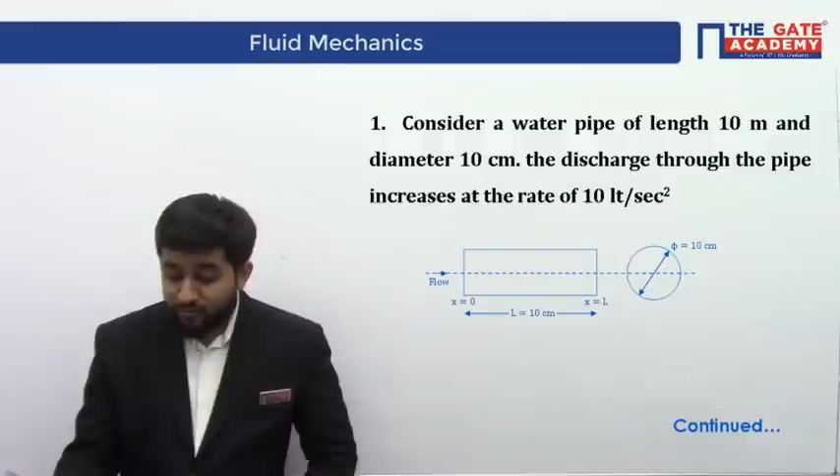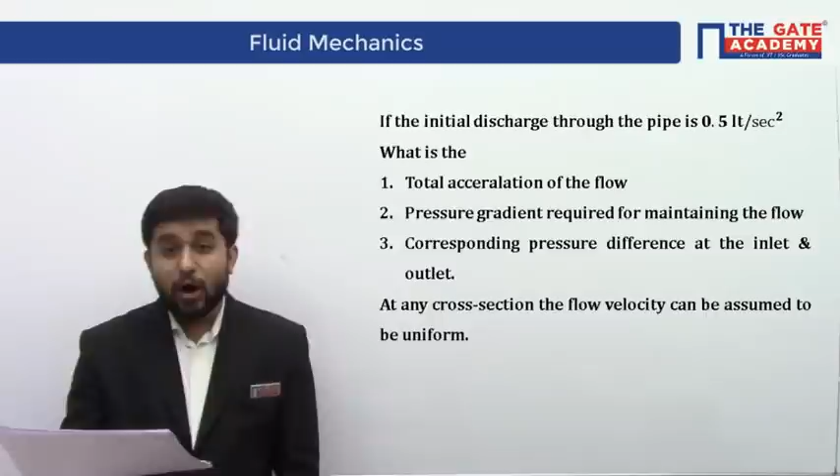Let us see the first question. Consider a water pipe of length 10 meters and diameter 10 centimeters. Through this pipe, the discharge increases at a rate of 1 liter per second square, and the initial discharge is 0.5 liter per second. Calculate the total acceleration of the flow. Also find the pressure gradient in the flow and the corresponding pressure drop required between the inlet and outlet of the pipe for the same flow. Give it a reading please.

I think the question is very easy. Let us suppose there is a pipe of length 10 meters, let us call it L. Also the diameter of the pipe D is equal to 10 centimeters. Now what they are saying is that the initial discharge through the pipe—initial means at time instant t equal to 0—at t equal to 0, the discharge is 0.5 liter per second.

They have given a term that says the discharge increases at a rate of 1 liter per second square. Please note, what is discharge? It is liter per second. So what they have given you is del Q by del time equals 1 liter per second square. This is how the discharge is increasing.

Now for the same condition, they are asking you to find out the acceleration in the flow, and then they are asking you to find out the pressure gradient in the flow and corresponding pressure drop.

Whenever such questions come, what is acceleration? Acceleration is simply dv by dt. So if you know the velocity as a function of time, you can get this derivative and predict your acceleration. So always remember, whenever acceleration in the flow has been asked, you simply need to find out the velocity field, and by derivating the velocity field with respect to time, total derivative of velocity with respect to time, you will get the acceleration.

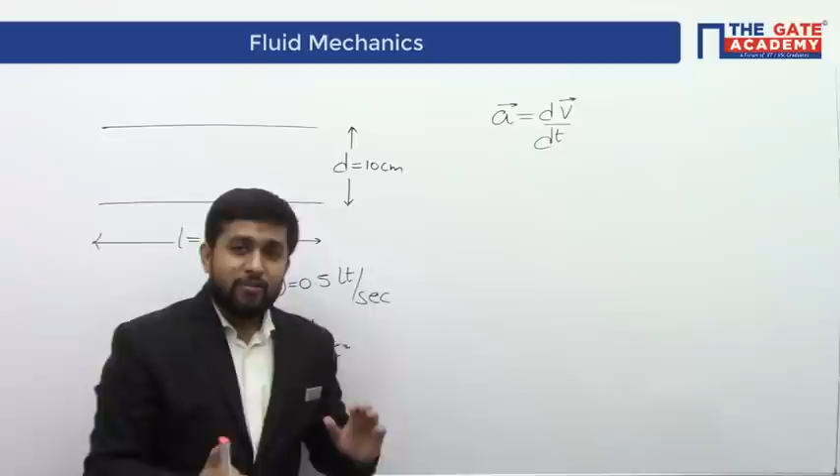Now actually in our syllabus, for such type of questions, there are two inherent assumptions which are generally not mentioned in the question. So I will ask you to cram this. Whenever such questions have been asked where they are asking you acceleration in the flow, you have to cram two assumptions.

And what are those two assumptions? Those assumptions are that if the flow passage is converging or diverging — here it has a uniform cross section, but suppose a question comes where there is a converging or diverging passage — in that case, you will assume that the convergence or divergence is gradual.

Let's see what that means. So suppose we talk of a flow passage. This is your flow passage, and this is the center line of the flow passage. Let's see what is the meaning of this assumption, and why we want to take this assumption.

So what I am doing is, I am marking a coordinate system here along the center line of the flow passage, and this will be my x, y, z coordinate system. Now it is definitely by intuition, if I take any location over here, whatever particle comes at that location, it will have a resultant velocity vector like this, isn't it? It will have a velocity vector like this.

Now these velocity vectors will have two components. So this will be along your v and this will be along your u, right? Now check, suppose this angle is theta — this angle is theta, which is like half the cone angle. Half the cone angle. So I think by alternate interior angles, this angle will also be theta.

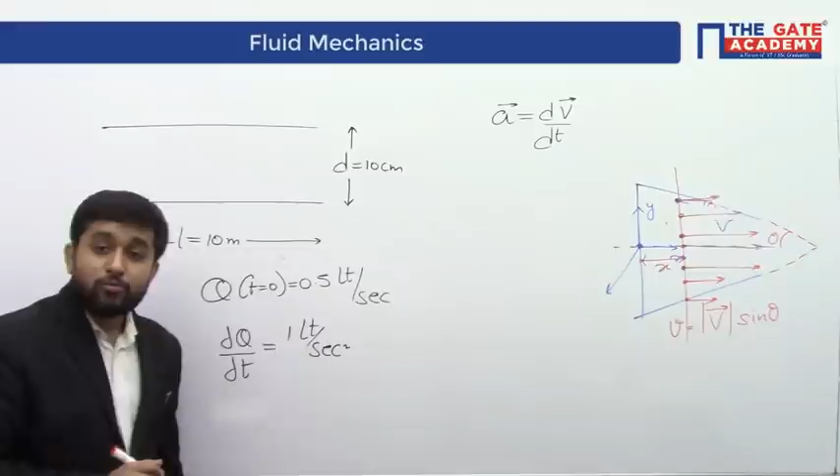Now I hope all of you are aware of viscosity, and we know that because of viscosity, there is a formation of boundary layer in the flow. What is the meaning of boundary layer? That is the layer of fluid which is adjacent to the solid surface. Those layers stick to the solid surface — no slip condition. And the layers of fluid which are away from the solid surface, they have maximum relative velocity with respect to the surface.

So definitely at these locations, the flow velocity u will be having a value 0. And at this location, which is at farthest distance from the surface, the flow velocity will be maximum. So what I am trying to say is that at a cross section, the velocity profile is not uniform, right?

But what we will assume is that in these questions, the fluid is non-viscous in nature. If the fluid is non-viscous, there will not be any formation of boundary layer. And since there is no formation of boundary layer, at any section, the flow velocity will be uniform. So basically, at any section, the flow velocity will appear like this, okay?

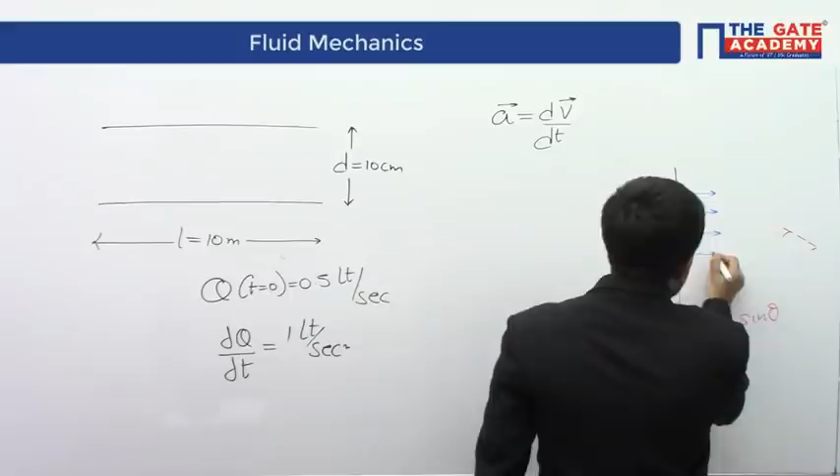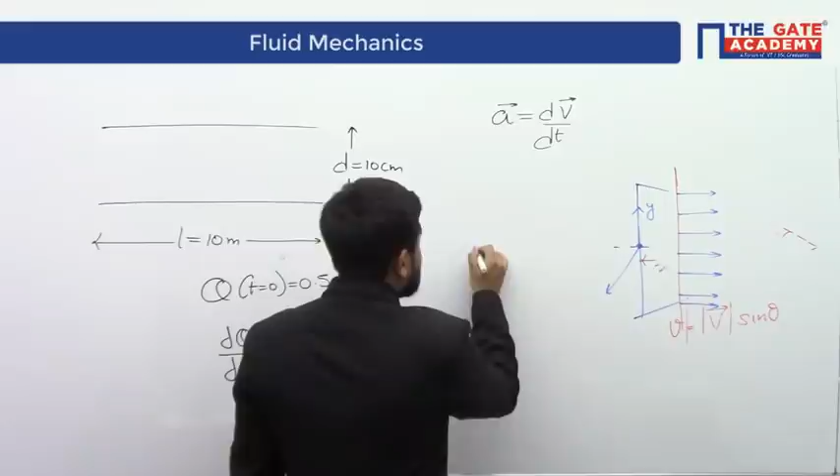And when the flow velocity at a section is uniform, then the same flow velocity is actually equal to mean flow velocity also. So how do you write down mean flow velocity? The mean flow velocity is simply discharge per unit area, okay?

So please note, actual flow and mean flow velocity are two different terms. Mean flow velocity is simply a scalar quantity which represents the discharge crossing a section. But actual flow velocity is the actual flow, that is u, v, w, and u as a variable quantity along y and z. It's like this, okay? But because of these two assumptions, we can represent the actual flow by the mean flow velocity.

So whenever a question like this comes, you simply need to write down the mean flow velocity, which is equal to discharge per unit area, okay? So I think that's all, that's sufficient for the discussion of the question. What you have to remember is that these two assumptions will be valid even if they are not written. So you will simply write mean flow velocity is equal to discharge per unit area.

What is this? This simply means that if in the flow I take a section, which is at a distance x from the inlet section, then at a particular time instant t, the mean flow velocity v here will be equal to discharge crossing the section per unit area of the section. Okay, this will be the mean flow velocity.

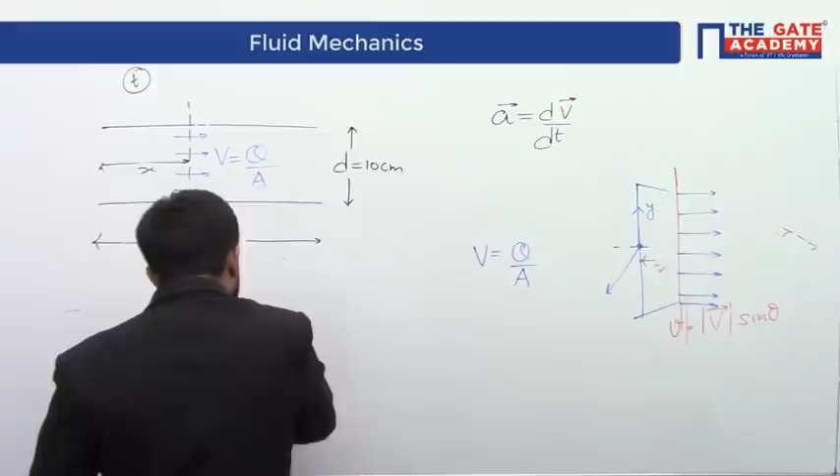Now let's write down the variables on which this mean flow velocity depends. I hope you remember that in Eulerian approach, we write down the quantities as function of location and time. Here also the quantities are function of location and time, that is x and time. Now as we are talking of mean flow velocity, that is the discharge crossing a section, and section is represented by the YZ plane, so basically now our location will be represented by x only, okay?

So check. I think when we talk of area of cross section, in this particular case, the area at x equal to 0, area at any intermediate x, and area at the outlet of the section is the same. But if this is a converging passage or a diverging passage, then for different x, areas will be different. So in that case, area will be a function of x.

Also, sometimes we have flexible passages like your blood vessels. So when fluid flows through these flexible passages, because of fluctuation in the local blood pressure, the diameter at a location keeps on changing. So area keeps on changing. So area becomes a function of time also, okay?

But since you are going to talk only of rigid passages, that is fixed solid boundaries, your area will not be a function of time. So you can simply write down area is a function of x only. So what we have is, for us, area will only be a function of x.

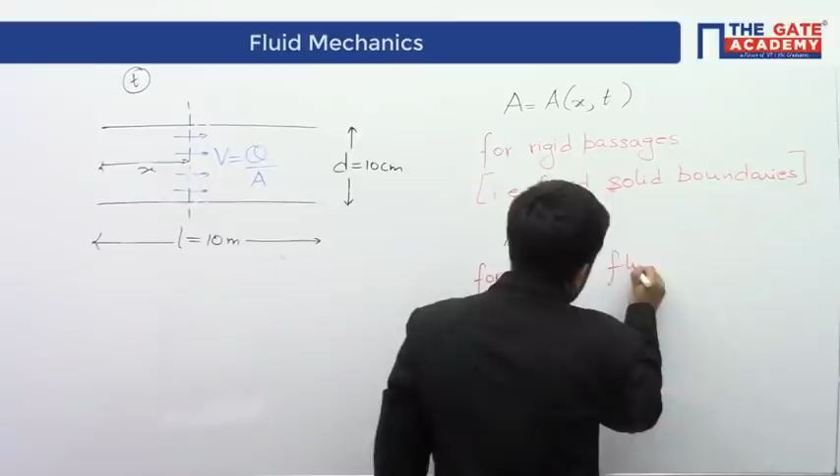So what you can say is, for incompressible fluids, your discharge is simply a function of time, because incompressible fluids means if 1 liter is coming inside from here, then another 1 liter will have to cross this intermediate section, and another 1 liter will have to cross the outlet.

So always remember, whenever you get a question like this, particularly talking of water or liquid, your area will only be a function of X, discharge will only be a function of time, and then you will write down velocity, which is discharge per unit area. This means discharge is a function of time, area is a function of X. Therefore, your mean flow velocity is also a function of X and time. So this is your mean flow velocity as a function of X and time.

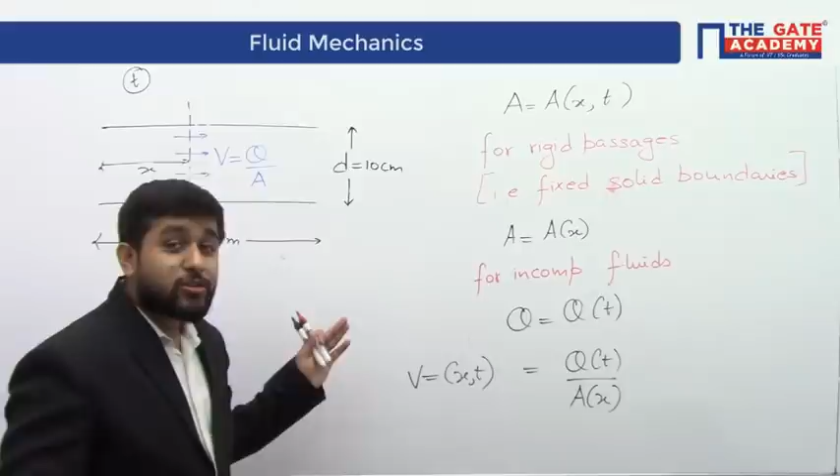Now we want the acceleration in the flow. So when you want the acceleration in the flow, you simply need to take the total derivative of velocity. So let's take the total derivative of velocity. But I hope you remember partial calculus.

In this particular case, we are taking the derivative of V, which is a function of 2 variables. So when you take the total derivative dV by dt, that is the acceleration in the flow, V being a function of X, you will have del V by del X, dx by dt, plus del V by del time, dt by dt. But this dt by dt will cancel out. So it's only this del V by del time left from that term.

Now, dx by dt, that is rate of change of x coordinate, is basically the actual velocity. But actual velocity is equal to mean flow velocity, so here you will have v only. So this becomes: v times del v by del x, plus del v by del time. So this is the total acceleration in the flow.

Now check: in the acceleration, the terms which have space gradients represent convective acceleration, and the term which represents time rate represents local acceleration.

What is the meaning of local acceleration? Local acceleration means local changes - at a particular location, say at the outlet, the velocity in the morning is different than the velocity in the evening. In the morning, Ram was crossing this location with a speed of 1 meter per second, and in the evening, Shyam was crossing this location with a speed of 2 meters per second. So we are talking of different times, but the same location, so definitely we are talking of different particles also. So we are simply saying that the quantities or conditions at a particular location change with time - that is a local change.

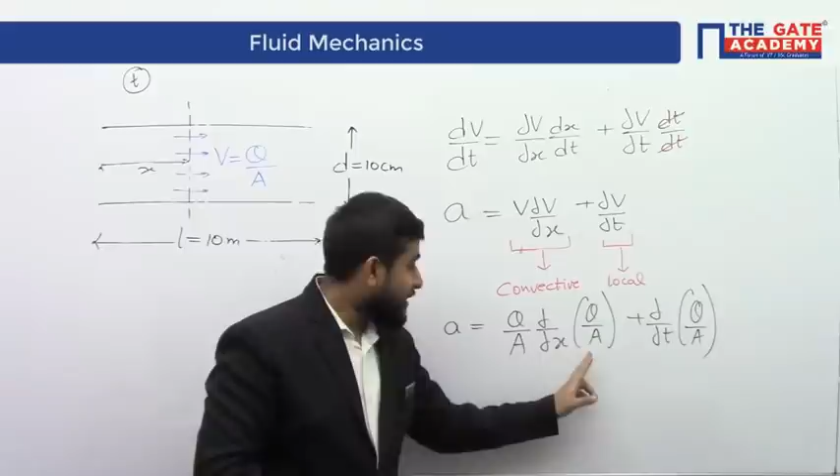Now in this partial derivative, del by del x, when you are doing partial derivative with respect to x, time will be constant. Therefore, functions of time will come out of the integral. Discharge is a function of time, so it comes out, and area is a function of x, so it remains here. So you will have q square upon a, into del by del x of 1 by a.

And then you have del by del time. So function of x will be a constant, therefore a will come out of the integral. So you will have del q by del time. So for acceleration of such problems, you can also remember this expression directly.

Now we have to solve the same. This is the acceleration, this is the expression for the acceleration. And here we will write down discharge as a function of time, area as a function of x. You solve this, you get the value of acceleration. This portion is convective acceleration, this portion is local acceleration.

Local acceleration comes into picture when del q by del t is non-zero, that is discharge changes with time. And convective acceleration comes into picture when area is a function of x. So if the area is a function of x, that means the area at inlet is different than area at outlet, so the flow passage is non-uniform in cross-section, converging or diverging.

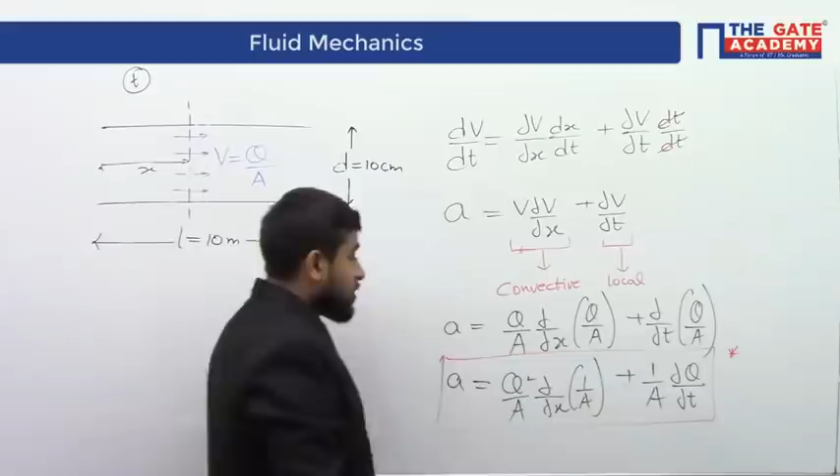Now in this particular case, since area everywhere is same, area will not be a function of x. So for this particular case, this derivative will be zero. Hence the convective acceleration in the flow is zero. This means there is only one acceleration in the flow, that is the local acceleration. So let us write down the final value of local acceleration and our first step will be complete.

So if I write down the local acceleration, that is 1 by area of the flow passage into del q by del time. Area of flow passage can be written as pi d square by 4, since this is a pipe. So here you will write 1 by pi d square. Diameter of the pipe is 10 centimeters, so 0.1, writing in meters because I want answer in meter per second square. So 0.1 square, and the 4 will go up.

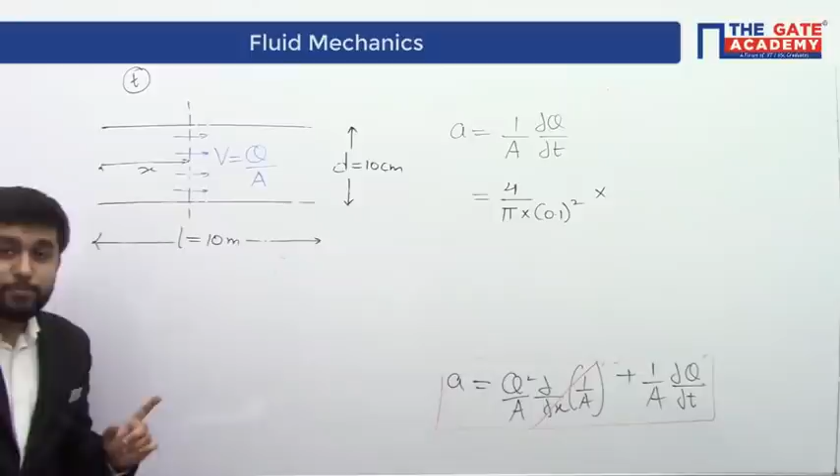And then I have del q by del time. Rate of change of discharge with respect to time is already given to us, that is 1 liter per second square. So here I will write 1 liter per second square. But in meter cube, 1 liter means 1 by 1000 meter cube. Okay, so this will be your final answer.

So I hope everyone has got it, understood it. Time is not much, even though I'm taking more time while solving a question, so that I can cover as much concepts as possible.

Now suppose there was a question in which area was a function of x. Then what you have to do is, first of all, you have to find out area as a function of x. You need to write down area as an expression of x. You will substitute it in the expression of acceleration and you will get your convective acceleration also.

Now many times what happens is that area is a linear function of x, or area is a parabolic function of x. So correspondingly in convective acceleration also there will be a term x. This means convective acceleration is a function of x. So at x equal to 0, that is inlet, and at x equal to L, that is outlet, the magnitude of convective acceleration might be different.

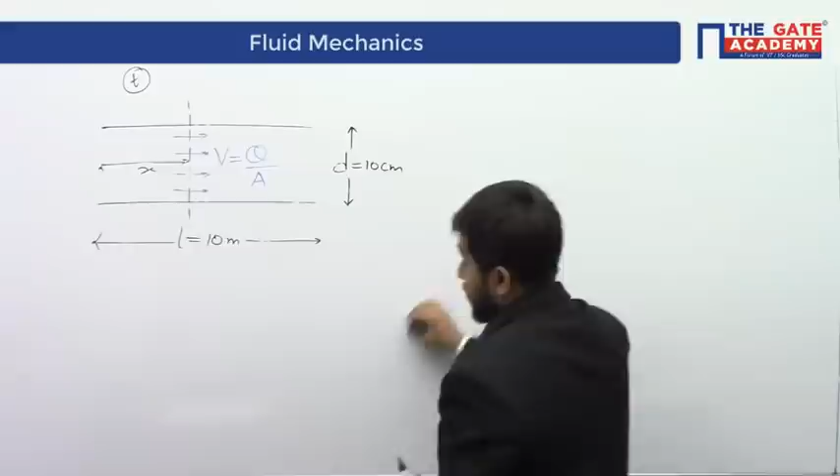In the second part they are asking us to calculate the pressure gradient. To find the pressure gradient, that is the pressure force, we need to move on to Newton's second law of motion. Let us assume we have a fluid element which has some mass, and this element has some acceleration in the x direction.

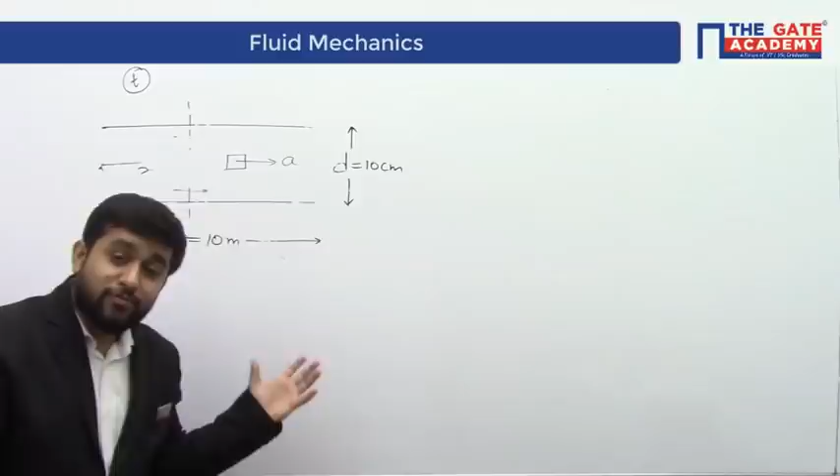Now in the classes what we have done is, first of all, we find out the pressure distribution on all the surfaces of the element. We write down the viscous force, we write down the gravitational force, and so on. So summation of all the forces should be equal to mass into acceleration. This is how we write it down.

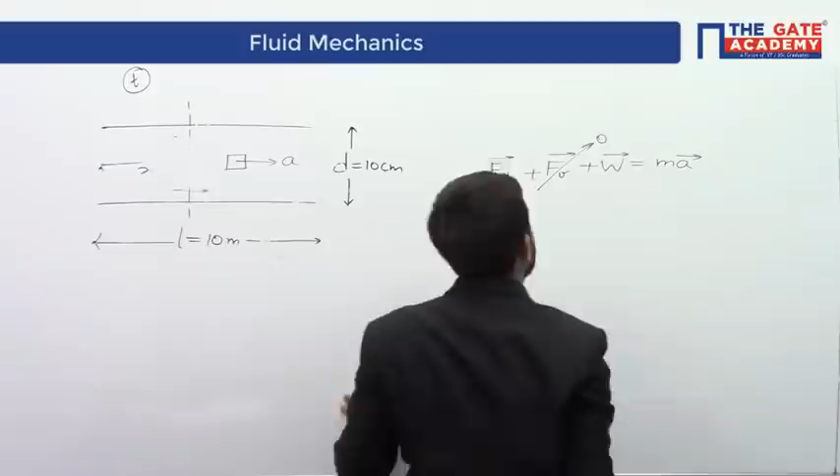But for these questions, we are treating the fluid to be non-viscous in nature, so your viscous force will be 0. We have considered the pipe to be horizontal, flow is along the horizontal, so your weight component will be 0. So only pressure forces along x have to be considered, and correspondingly this is m times ax, where ax we have already found out. It is 0.127 meter per second square.

Now for the pressure force, when you write down these values in this equation in terms of per unit mass of the element, we get something like this: minus 1 by rho del P by del x is equal to ax. This is nothing but Euler's equation, right?

And in order to derive Bernoulli's equation, I will substitute the condition that the flow is steady, so here you will be left with only convective acceleration. But this is a general Newton's second law of motion for a non-viscous fluid. In this equation, I have neither put the assumption of steady state flow, nor the assumption of incompressible flow. This equation can be written for both compressible and incompressible flow, for both steady and unsteady state flow.

Now in our particular case, the acceleration is only local acceleration and the fluid is incompressible in nature. So when I calculate the pressure gradient, it is simply minus rho into our local acceleration. This will be, since we are talking of water, density of water, and our acceleration is 0.127 meter per second square. So ultimately we will get minus 127 Pascal per meter. I think this is what we will get.

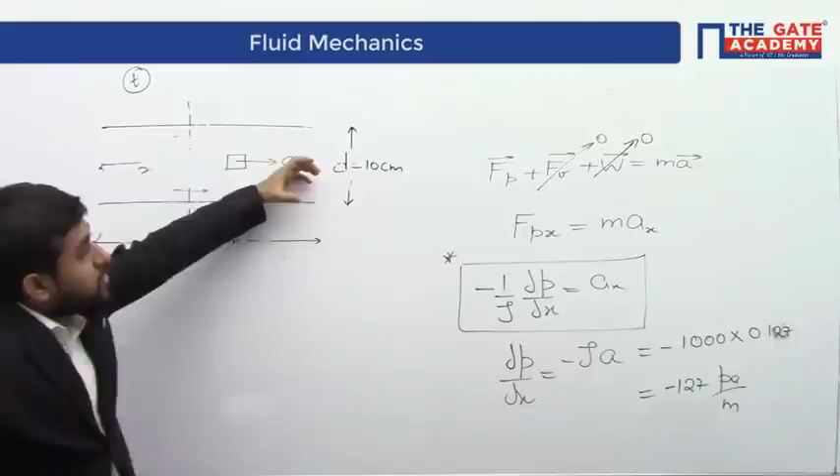Now someone will say why the pressure gradient is negative. Please check, the fluid is accelerating in this direction, right? The local acceleration was a positive term, this means it was along the x direction, so the fluid is accelerating in this direction. Now this acceleration is only possible if here the pressure is higher and here the pressure is lower.

Now this acceleration will not be observed in a time instant but in a time period, and you can forget this last statement of mine, you need not concentrate on it. So here the pressure should be higher and here the pressure should be lower.

Now how do you write down pressure gradient? I think you write pressure gradient as P at x equal to L minus P at x equal to 0, divided by x equal to L minus x equal to 0. This is how you write down pressure gradient. Now pressure at inlet is higher than pressure at outlet, so the smaller value minus larger value, that will be negative only. So your pressure gradient is minus 127 Pascal per meter.

Now I think using this expression we can find out the pressure drop also. So this is pressure at outlet minus pressure at inlet divided by L, and this is equal to minus 127 Pascal per meter. So your pressure drop, which is Pi minus Po, L is 10 meters, so this answer becomes 1270 Pascals. So across the pipe we have created a pressure difference of 1270 Pascals.

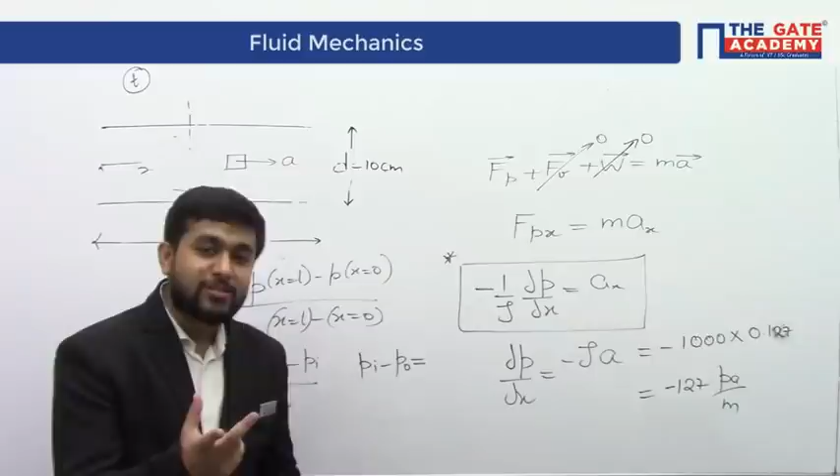So I think in the question we have solved all the terms, that is local acceleration and convective acceleration. We saw how to write down local and convective acceleration, then predicted the acceleration for this particular question, and from the acceleration we found out the pressure gradient, and from pressure gradient we found out the pressure drop. Now please note, whenever the flow is steady, the pressure drop can be found out using Bernoulli's equation. But this was a case of non-steady flow, that's why I have used this particular method.

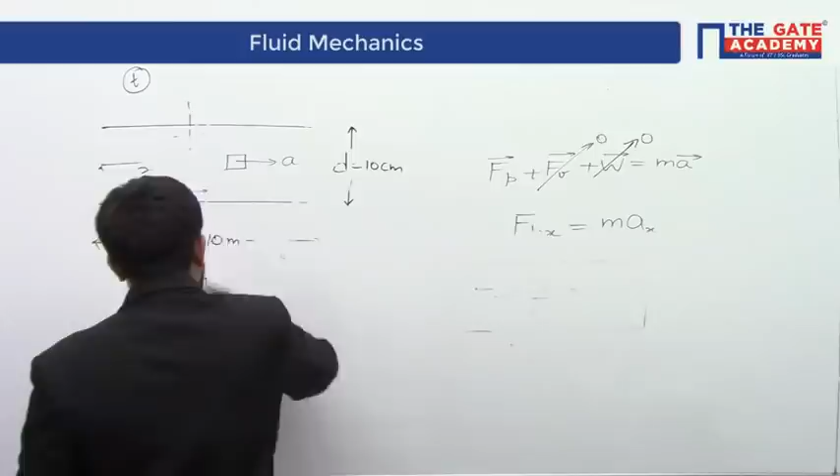Now let's move on to the second question. I think the next two questions are based on hydrostatics. A lot of questions from hydrostatics are asked, and this particular question which we have done till now is not only asked again and again in GATE, but also in IES, ISRO, BARC and other examinations. However, there might be a variation. In our question we discussed local acceleration; in their question there might be convective acceleration instead, so you need not get confused. The idea is simple: write down the main flow velocity, which is discharge per unit area, find out the expression for acceleration, and then substitute the given values.

Now let's move on to the second question as well. So what we have is, in the question it's given that the fuel gauge for a gasoline tank in a car reads proportional to the gauge pressure at the bottom of the tank. The tank is 25 centimeters deep and accidentally contains 1.5 centimeters of water in addition to gasoline. Estimate the height of the air column in the tank when the fuel gauge erroneously reads full.

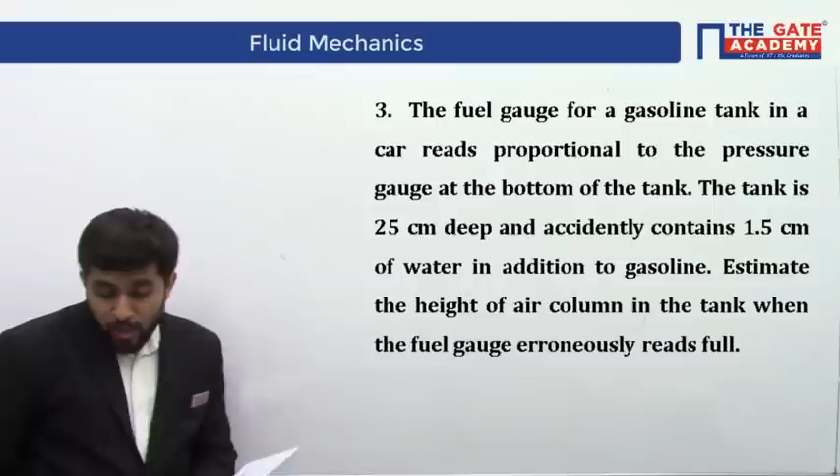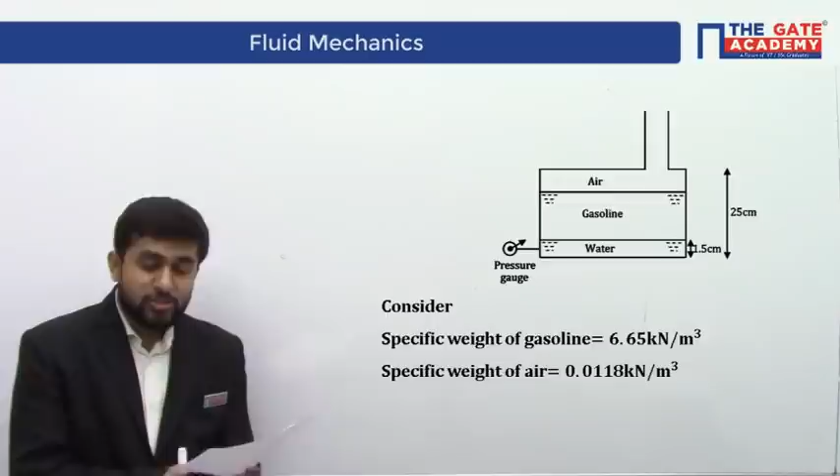There is also a figure given to us. In the figure, the gasoline tank has been shown. The height of the gasoline tank is 25 centimeters. In the gasoline tank there is water, and the height of the water column is 1.5 centimeters. The height of gasoline and air is not known, and I think this is what has to be found out. They have also given us the specific weight of gasoline, that is density into acceleration due to gravity, and the specific weight of air. The specific weight of water is not given, so we will treat the water density as 1000 kg per meter cube. Let's see what the question means and how to solve it.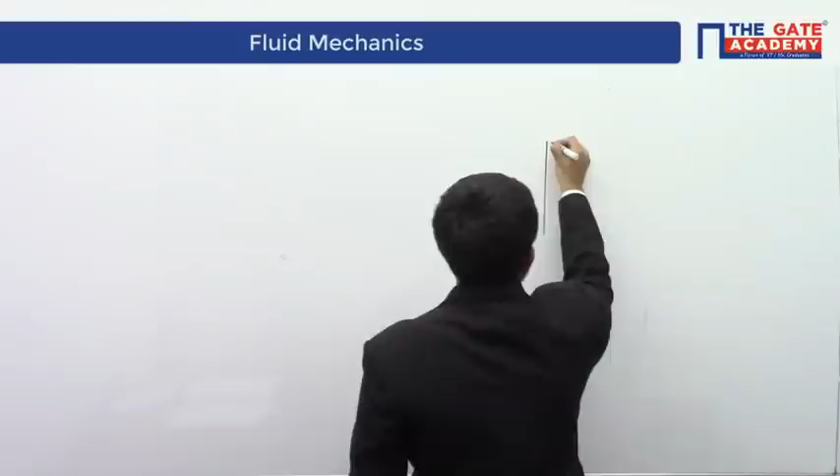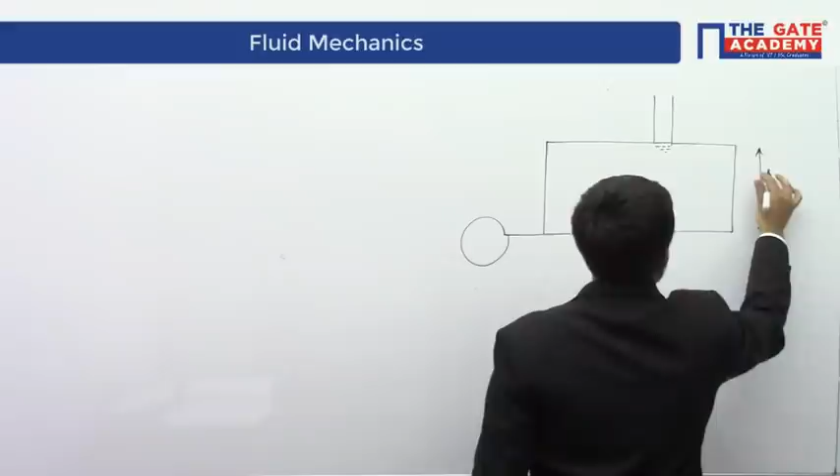Basically what they say is, suppose there is a car, like a Swift Dzire, and there is obviously a petrol tank in it. In order to check this, your odometer or the fuel gauge on the display tells you whether the tank is full, half empty, fully empty, or in reserve. How does it operate? There is a pressure gauge at the bottom. Now suppose the tank is totally full. When the tank is totally full, you will have petrol up to this much level - so inside the tank there will be 25 centimeters of petrol, and its upper surface will be exposed to atmosphere. So what will be the pressure at the bottom? It will be atmospheric pressure plus 25 centimeters of gasoline.

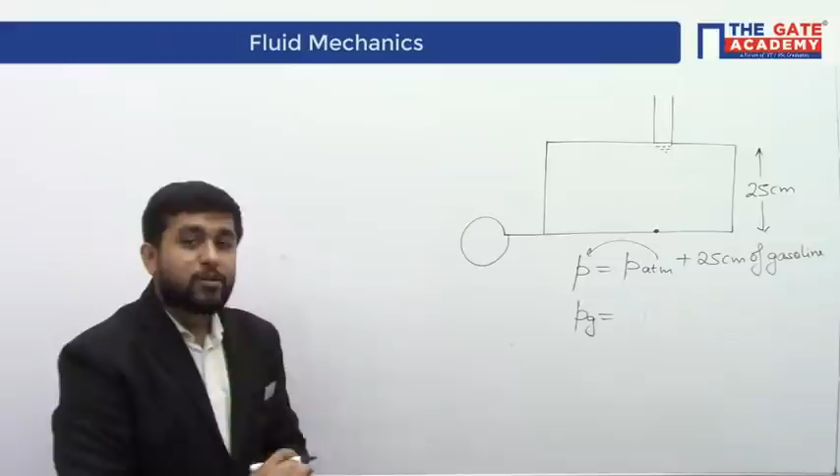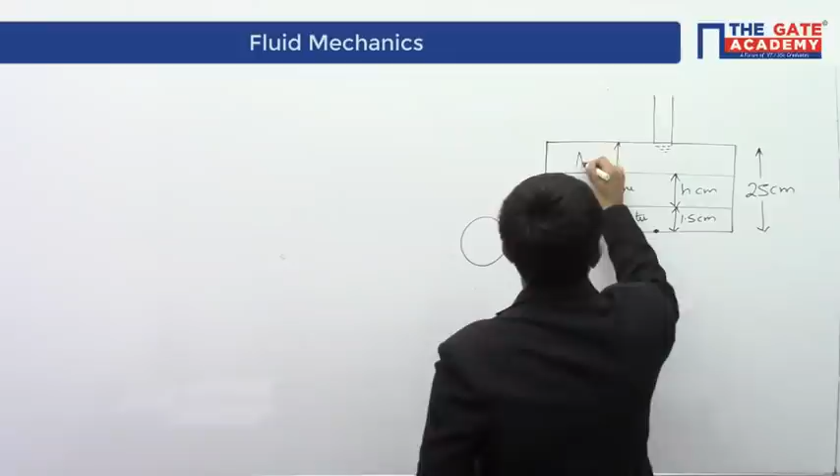Now what they're saying is that the fuel meter is still showing full. The fuel meter works on the reading obtained by the pressure gauge, and the pressure gauge will say that whenever the pressure is equivalent to 25 centimeters of gasoline, then only it is full. So basically what it means is that currently, in this situation also, the pressure is equal to 25 centimeters of gasoline.